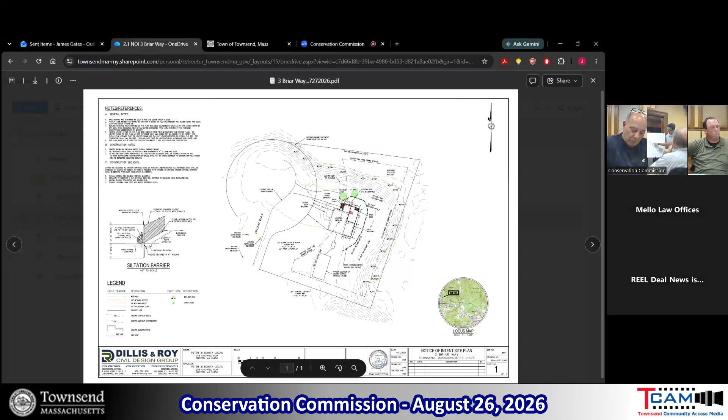The second part of the addition, on the back of the house if you're looking at it from the street, we have a deck that will be at the same elevation as that mudroom, and then a second addition on a foundation that will function as a new master bedroom. The square footage of the deck, which will be semi-permeable, is 350 square feet. The bedroom addition, with dimensions shown on the plan, is about 326 square feet.

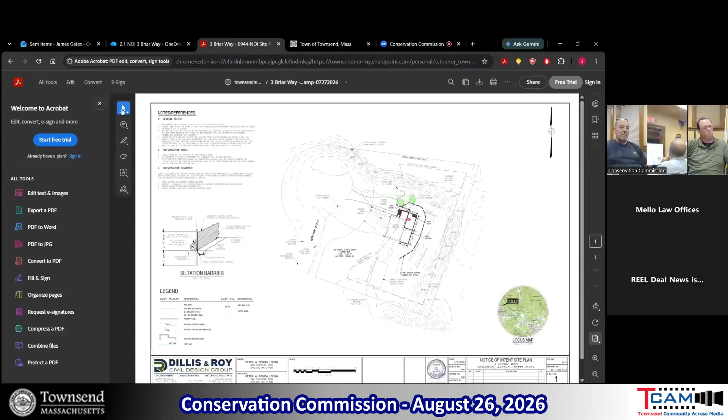Can you explain what you meant by semi-permeable? There'll be slats and spaces between the decking so water can percolate down through, and it's going to be on sonotubes, not a concrete or soil pile foundation. Is it sonotubes or helical piles? Frankly, I am not certain of the answer to that question. Either way, they're minimal disruption compared to a foundation, correct? Yes.

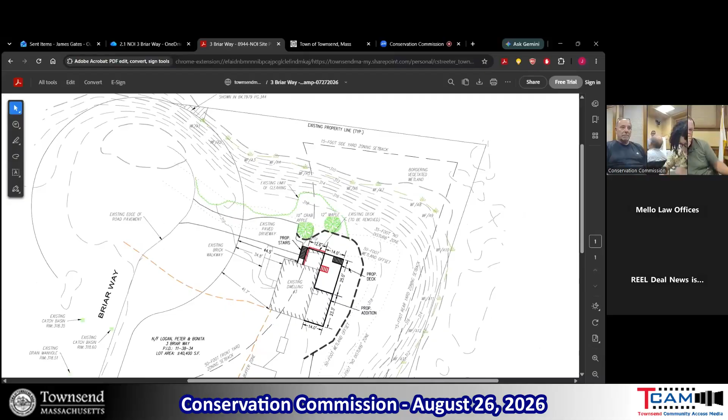Okay, thank you. The site is underlain with good sandy soils. We have the Title 5 report from the septic system showing good sandy soils on site, as with a large portion of this area. We've limited disturbance to completely outside of the 50-foot wetland offset. We do have erosion control barriers that will function as a limit of work, running nice and tight along the 50-foot line to the proposed work and along some vegetation. We are not proposing any tree removal for this project.

I can speak a little to compliance with the bylaw. We are not proposing any disturbance within the 35-foot no-disturb zone, nor any new structures within the 50-foot wetland offset in your bylaw. Again, the existing house is entirely within the 100-foot buffer zone, so any expansion is also going to be in the buffer zone, which is why we're here and why we filed the notice of intent.

The site is very flat and very open in the back right now, so we don't anticipate any significant risk of runoff or erosion associated with the project. And as was mentioned, we did have a file number from Mass DEP already.

Here are some pictures. That's the backyard. On the left side, you can see that corner of the house, that's where the primary building is going, the master bedroom. That's the deck that's coming down. Those are the two trees identified on the plan, which we're saving. That's the deck being removed for the mudroom addition within that same location. And that's an overall view of the backyard.

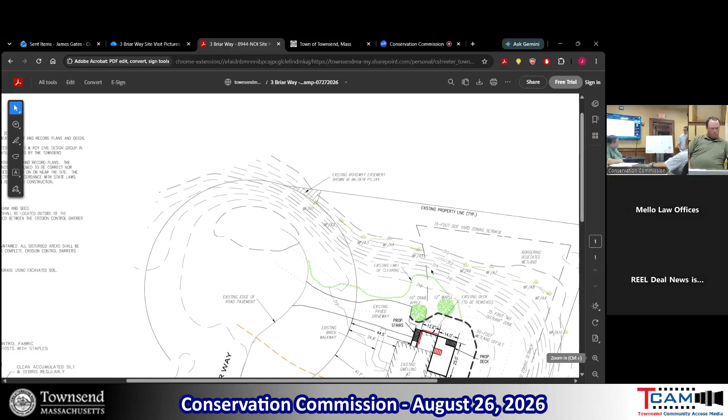You're just going to use wattles rather than straw bales? Actually, we'll have wattles with reinforcement silt fence. Okay, and that, to me, seems more than sufficient since it's so flat.

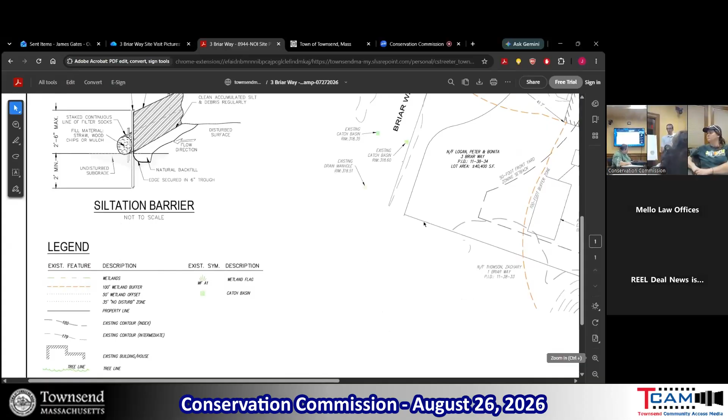I think the wetland boundaries weren't flagged. How does that work - are they supposed to be flagged? That was going to be my next question. When are we going out to verify the flagging?

So I did ask Brian - sorry, Ryan, I must have misunderstood his name - why it was not flagged. We had not marked out the proposed additions, but the flags were hung in the field.

And then it's pretty well defined at the toe of the slope. Yeah, I mean, it's a very obvious lot, so what's going on - the dynamics are straightforward.

They have no yard, and it goes directly into - right. So, Kim, because you're so new to the commission, Mike will get your phone number. So Mike, we did do a site walk. My apologies, I was left out. It's okay, I didn't know you weren't in the roster officially yet. We'll have your name in immediately.

So, but you did flag it? Arrow flag, yes sir, yep.

Where do you plan on stockpiling? So the flags were checked, is what you're telling me? They are flagged in the field. Has this commission or its agent checked? I'm just saying maybe it was done before - this is what we would normally do. I think you recall me asking about the transition flags. Yeah, you did. I did not see any. I didn't notice any either. I'm pretty quick, but okay, so you look, the flags are further down, correct, within the woods - so unless you went down to the edge of the water you probably wouldn't have seen it.

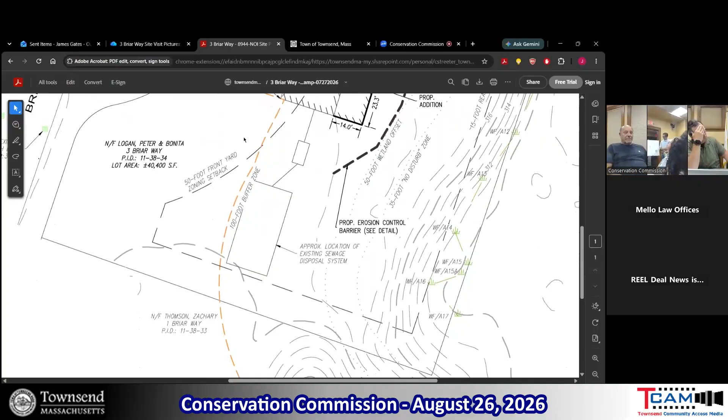We should note the location of where the stockpiled material is going to be, because that is part of our regulations.

So you want a stockpile area like we do every other place, within the silt fence, right? That's what we do, Mike. So I was under the understanding everywhere within the silt fence would work. Then we can go around the stockpile area, one last time, or another time.

So where the wattle is located is consistent with the crown of the tree, but it could be pushed right up next to the trunk of the tree, in theory, or even go around the backside of the tree.

Well, if you do that, Mike—if you start getting under the drip line of the tree, the chances of that tree dying go up exponentially.

I would just like to point out, I do have a note under the construction notes that construction materials, to the greatest extent practical, shall be stored outside of the 100-foot buffer zone. I also provide an addition that construction materials shall not be stored within the... given the nature of the project, it's not uncommon to have building materials right next to where work is happening.

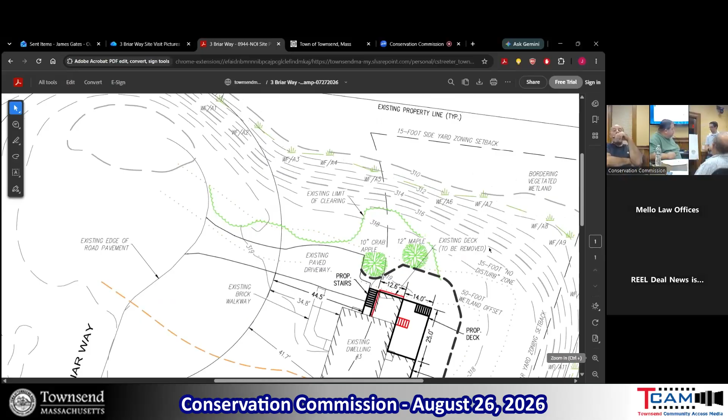Can we see a reason why we can't be moved farther up? It can, we can ask. Well, this is up for discussion. Sandra, you've been quiet, we'd like to hear your thoughts. And same with Abigail, please, both of you.

I appreciate you asking. I was just listening to Mike saying the wattles could be brought closer, and I wasn't aware of that, I'm just learning something new here. But not closer, farther away. So there's more working room within that. Oh okay, I'm sorry.

Were you notified of the site walk, Sandra? Did you get a call about the site walk? Yes, thank you, I did. I was hoping to go but I was unable to. Yeah, it's all good.

That's why I appreciate the photos, so I can get an idea. Could you go back to the photo of the open yard? This one? Yes.

Did you guys ever figure out what that mound is? I did not, no. It's a question, but it has no bearing on the site or anything in it. It's not covering anything, it's just a small anomaly of dirt from who knows what. Could have been leaves from years ago, could have been some dirt they left there.

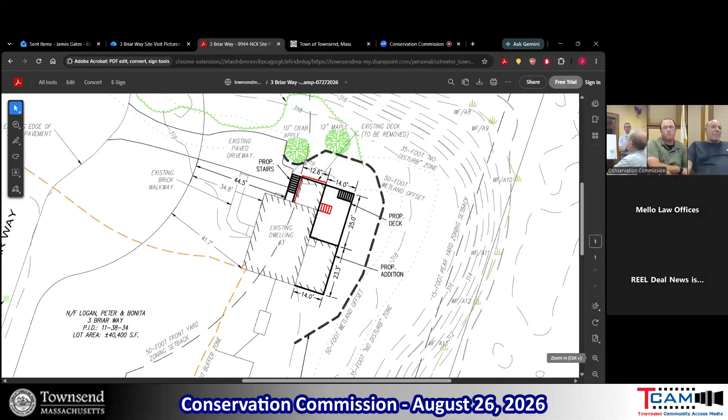Now, if there's existing lawn area that they've been maintaining historically within the 35, can they continue to maintain that in the backyard? If it's existing, yeah - it's been mowed, and from when I saw it, all those mowed areas are existing. Yeah, that's why I just don't want them to suddenly... I understand it's a beautiful green lawn, but it's been a long time. Right, so that's my point exactly.

It's not new disturbance we're proposing. Well, just to solve this issue going forward, we need to make sure property owners know clearly where their boundaries are when it comes to wetlands, so they don't exceed that jurisdictional area. It's as simple as letting the Logans know that if they do this addition, you're gonna lose your backyard. You can't expand beyond this point as far as your backyard goes. It's as simple as that.

And we can discuss amending or adding that regulation. Tonight, I think it's a simple request, honestly. It's kind of like a courtesy, really, to let people know that if you do this, you lose that area.

I think for chain of custody purposes, because you can talk to one homeowner and they can be perfectly understanding, but you don't know they're gonna maintain ownership of that property in perpetuity. That's why you write it as a special condition, and then it goes with the deed. Every plan is different, it's unique, but as a courtesy you let that particular applicant know at that time that if they desire to do this, they're gonna be limited to the backyard. Unfortunately, we're gonna have more and more of these, I think.

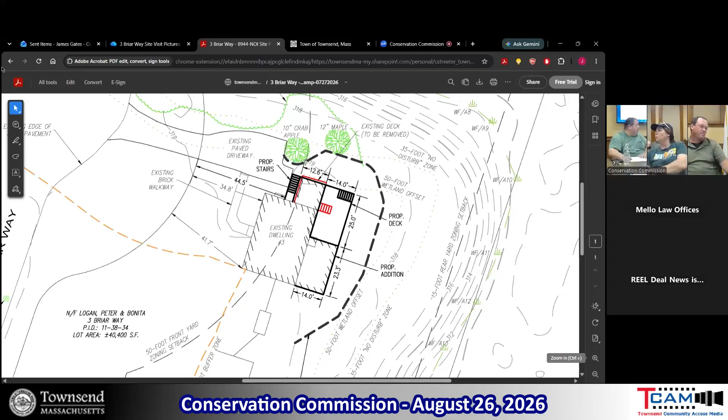We're short staffed right now, so I don't think they're doing that. I was gonna say, when was this house built? Well, it's been a very long time. I pointed out the sidewalk.

There's actually an easement at the end of this cul-de-sac that says 'for future roadway,' and it points directly to the wetlands. I think it was done in the 70s or 60s. I forget what the subdivision plan was, but I think it was late 60s, early 70s, when Robichaud was up. So, okay, a long time ago.

We keep going. We have a 7:45. Sorry, I know, no, I have more questions.

Okay, go ahead. Have we confirmed that the abutter notification has come back and they match the list? I sent it, I did. We missed, I missed living in the past, we literally used to go through the cards and check the list off. Yeah, we don't do that anymore, does anybody do that? Everything's all digital now, online, received, and it goes through. Like the post office can send you verification, and there's an effort to keep it green and save paper.

Yeah, those little cards, something that fell upon Colby to make sure it was printed out. Usually the clerk would go through, as you were referring to in your day, Kim, we'd take the name off the green card and check it off the list. Right, that's how we always did it. So that's all changed, it's digital now? Yeah, it is. Jimmy has such a tough time with that. I do, I struggle with it. I used to like the green card here.

There you go, so that's what that means. I didn't know what that meant. Yeah, there's only 3 or 4 abutters. It's fine, it's counted.

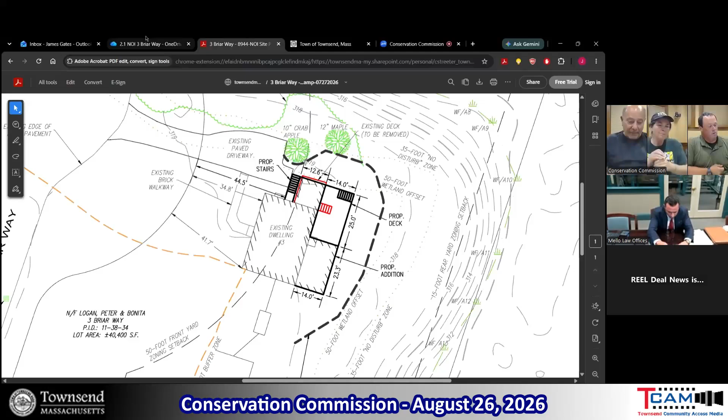I'm gonna make a motion. Brian, I'm sorry to do this to you. You've got to make a motion to continue this. I can't.

Can I make the motion? You can make the motion, Sandra. Okay, right now? Yep, right now, I apologize. I'd like to make a motion to continue the hearing for the mention of DEP number 308-0732 to the next meeting, which is September 9th. Thank you.

Ryan, I'm really sorry, but we need it broken down better, and we also needed a Townsend wetland bylaw. So this is just a breakdown of what we were left with.

In regards to the wetland bylaw, is that something on our end? I have a copy of just one check, but it doesn't break down. There should have been a portion that went to the state, a portion that went to the town.

Who's it made out to, Tom? Town of Townsend - it's vague. We have zero help right now. Absolutely, the admin that's helping us is doing everything she can to catch us up.

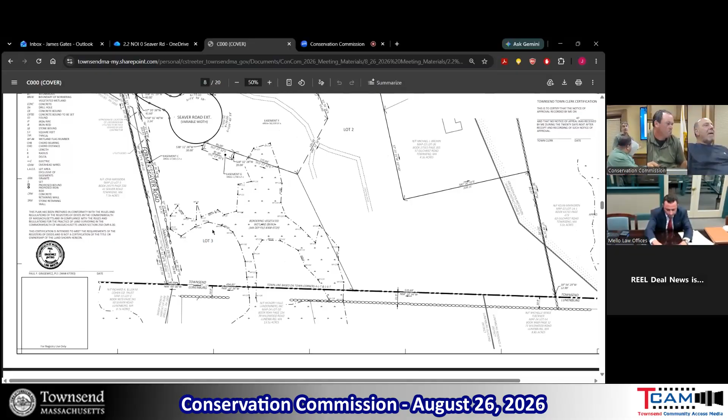So while we're scrolling, the design is predicated on your local stormwater standard, which regulates development for water quality and water quantity mitigation based on the 10 standards of the state policy, as well as what is effectively the EPA's MS4 requirements for DPWs. So that means there's, in addition to the state stormwater standards, total phosphorus and a higher level of TSS administered through your local stormwater permit.

Since this falls in a major stormwater permit category that's administered by the planning board—it does fall under the major storm—correct. And so the applications to the planning board were for definitive subdivision and for the major stormwater. Okay, so the subdivision, the planning board had...

The bid set of plans, and the stormwater report peer reviewed by Hoyle Tanner for both compliance with the subdivision regulations as well as the local stormwater regulations.

And that hearing the other night, well, a couple months, I mean, a month or more ago, the stormwater with planning was complete. Their peer reviewer says that all comments have been addressed, that this satisfactorily meets all your local requirements.

So it meets all 10 standards of the state, 1 through 10 that you're accustomed to, in water quality and water quantity, and that doesn't involve a 401, right? That's correct, there's no 401 here. There's no alteration of any boundaries, so therefore they would not have triggered a 401 water quality. Doesn't trigger a 401. Gotcha.

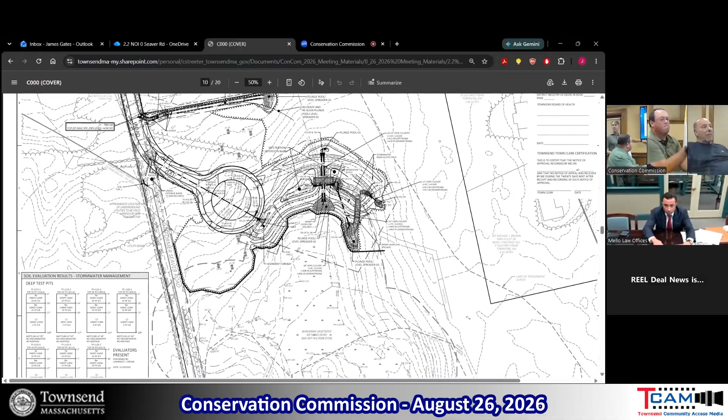Okay, right here. We've already picked through this plan. I know, and Wayne went like, wow, right. And the site walk was rather in-depth. Right here. You were there too, right, Mike? Mhm. Okay, so I think you were the only ones there.

This is going to show you the work that is generating the conversation and within your jurisdiction. So again, the wetland system kind of sticks up off the bottom of the sheet here.

The bolder line is the 100-foot buffer zone that runs around the site like this. Then your 35 and 50-foot buffers are down in here. The 35 is this dash line, there's no work within it. The 50 is slightly beyond that, there is work within it. And then, of course, the 100 out here, there is grading and all stormwater infrastructure. The road ends just shy, and the right of way ends just shy of the 100-foot buffer.

The paved road actually ends about 110 feet from the wetland, to the outside edge of the cul-de-sac, the outside edge of the pavement, just to that edge, about 110 feet from the wetland.

And then the outlet pipe from the stormwater system that would drain the road and empty into this system is just within it, maybe 10 feet within. And the rest of it, there are some other pipes, outlet control structures, everything to manage the flow of the runoff that reaches these ponds, as well as those two culvert lines running through the center here.

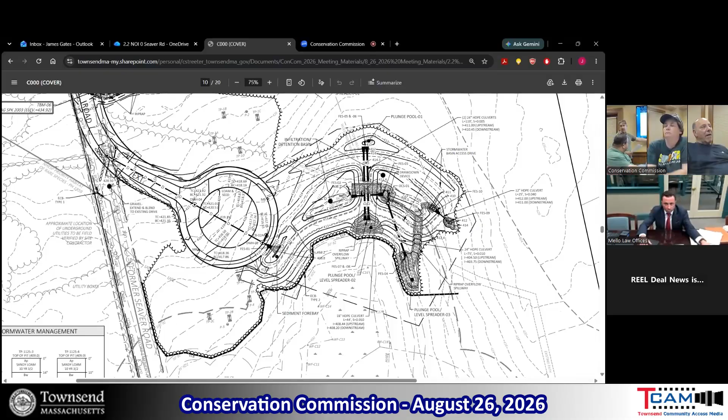Those are to collect the tributary area that is from offsite, from the neighboring homes, and rather than route it into the stormwater system and overtax that, requiring it to be larger, we're passing it through the system under the basin and into a discharge point, again, outside the 35-foot.

So it's actually outside the 50-foot. So all of this would be, with the exception of the pipes and some flared ends and an outlet control structure, which is really nothing more than a manhole with two holes in it to allow water to pass through at controlled rates, all earthwork, no concrete or other materials, other than the pipes and the structures.

If this is primarily what you're looking at, it's primarily earthwork. There would be some rock riprap for overflows and outlet protection, for all the slow-down sections to where you still have water. Exactly. So all of that will be included in the stormwater report. Some of them will have a man-made product in there. Right, there's no man-made product except for the pipe.

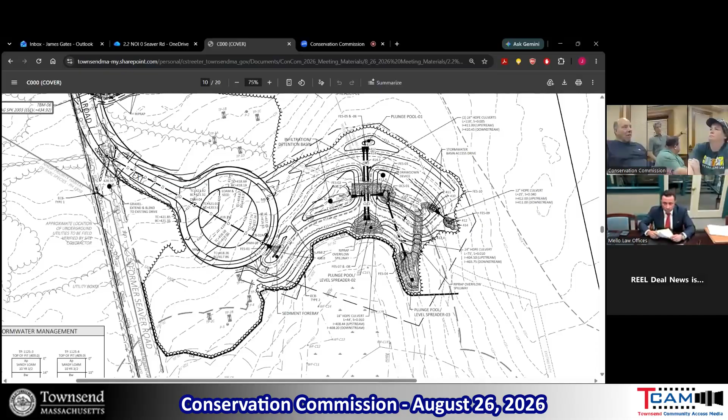So this is all documented in the stormwater report that was done in June, which was essentially the stormwater report that was done originally in January or February. That was originally filed with the commission, with the exception that we beefed up the documentation to demonstrate compliance with the phosphorus and the 90% TSS removal.

The simple way of thinking of how that's accomplished is the federal guidelines say that if you're using certain types of stormwater BMPs, in this case an infiltration system, retaining and infiltrating up to 1 inch, the equivalent of 1 inch off all impervious areas, satisfies the phosphorus and TSS requirements. Depending on the soil conditions, there's a sliding scale. There are actually graphs and numerical methods to solve it. We included the graph as pictures, and it's much simpler to understand. But again, that's all calculated and tabulated in the stormwater report.

This was again peer reviewed by the town's consultant, Hoyle Tanner. That was the first round; we did get a clean bill from the planning board's third party consultant. Correct, because we have no ability to review a stormwater report ourselves. A lot of commissions aren't able to either. So why are we stuck on it? Let's keep going.

Essentially, your jurisdiction is this 100-foot line, with the understanding that during construction there will be disturbance. And then eventually there will be homes that will require additional disturbance, which are not part of this plan. So there'll be separate NOIs filed for the home construction at the time that the road is ready, when the town is ready to permit building.

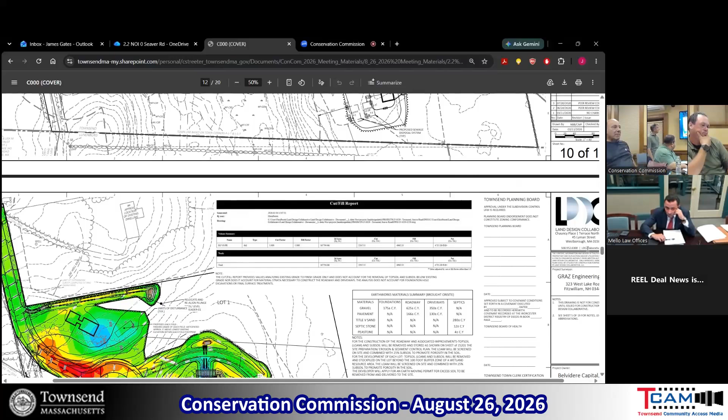Hold on, yeah, did I go too far? No, that actually shows the house. Oh, there you go. I'm trying not to go too fast.

Would it have been helpful for us to have a plan in front of us? It would have been helpful, but it's so many pages. So here's the house you're talking about.

Right, and isn't that the buffer zone line going through the middle of the house? That is, yeah, correct. So no alternatives were explored — they're just kicking it to us if they approve it? So as I say, we're not asking for approval of the house location.

I understand. So the road layout was assessed multiple ways. There's no alternative to the road layout except to shorten it, and then you'd get 2 lots. We got that from Wayne. So this road, which is the allowable distance by the planning board, creates enough frontage for 4 lots.

So this is a 3-lot proposal, but once again, state 4 could go in there. Well, we're not doing that. There's a couple things — you're talking from a stormwater perspective, absolutely. This would still be exempt from the state stormwater, but it's irrelevant in the town because you have a more restrictive standard.

Much more, similar to all the other towns. Kim, ask your question please. Kim, I'm sorry, I didn't mean to cut you off. I can't even ask it as a question because we're not looking at the houses, but I can see what's gonna happen with lot 3.

It's possible — it's a 2,000 square foot house. You're gonna have a young couple with a couple of kids, they're gonna want to use their yard, but their house is in the buffer zone. So we're showing the 35-foot buffer, and you were talking about demarcation or delineation of the buffer zone.

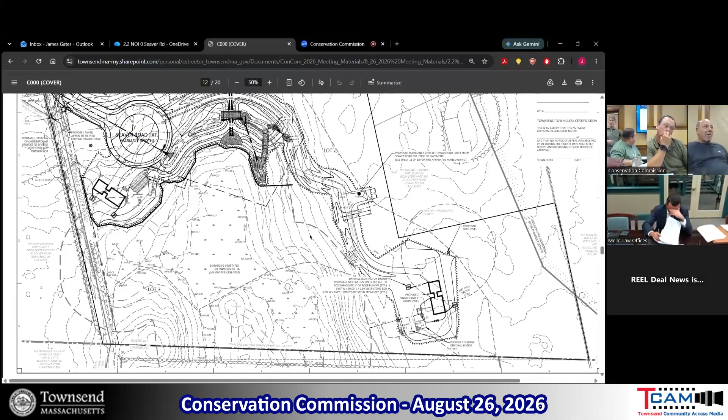Keep scrolling, I'll start answering other questions. There's construction details for all of this, erosion control measures, the BMPs, every pipe and outfall and all those items required for planning the construction of the road - road cross section, roadway depth, specifications per MassDOT or AASHTO requirements. There are a lot of dynamics on this set of plans, everything down to water drainage and water controls.

We're trying to be thorough, I understand that's the requirement, but there's a lot to it, there's a lot of moving parts, there's some history behind it. I'm more looking at some more history to this, that's all I'm gonna say.

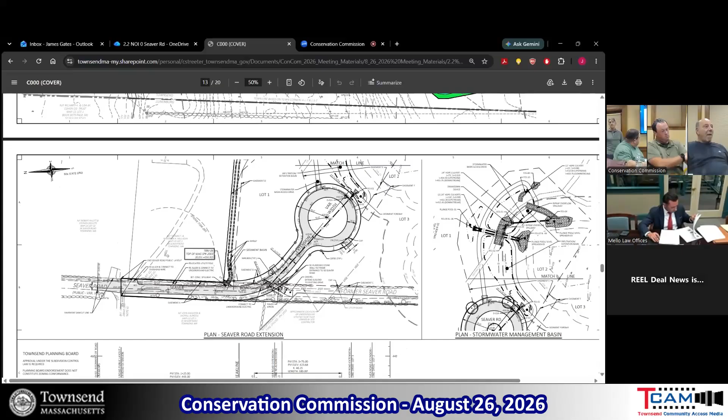So your road profiles have been deemed adequate and consistent with your town requirements. There's a planting plan for the street trees.

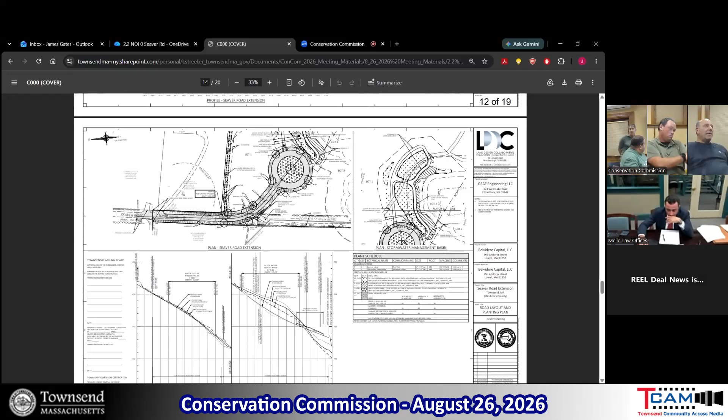Has this still presently been in front of the planning board? They continued the hearing Monday night. Has anything changed since this was last in front of us?

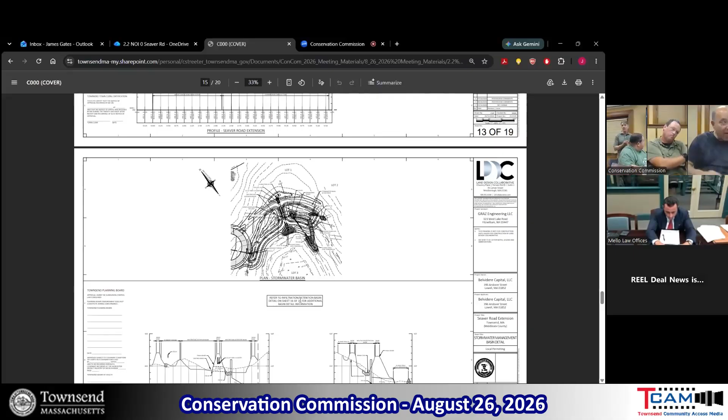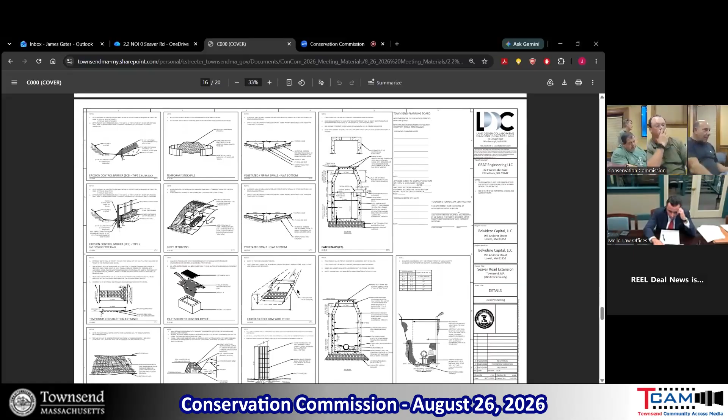What's changed is the documentation of the stormwater, and then commentary regarding plan content necessary to check a box in the subdivision regulations. But the layout of the site, the road, the grading, drainage network, the location of the home all remain the same.

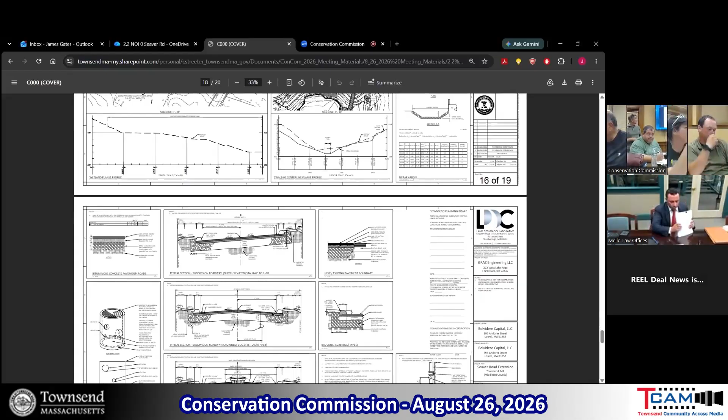Right, and that's something we would have probably picked up on when it came to us. How does that carry through? So since it's on this plan, you make a condition that the infiltration trench along that particular lot is constructed - it goes with that particular lot, that particular house.

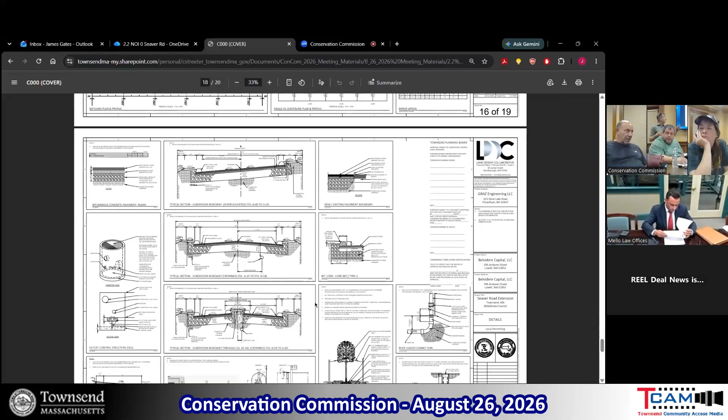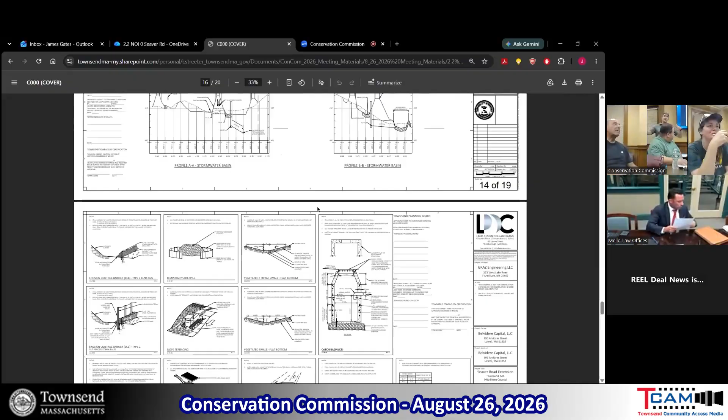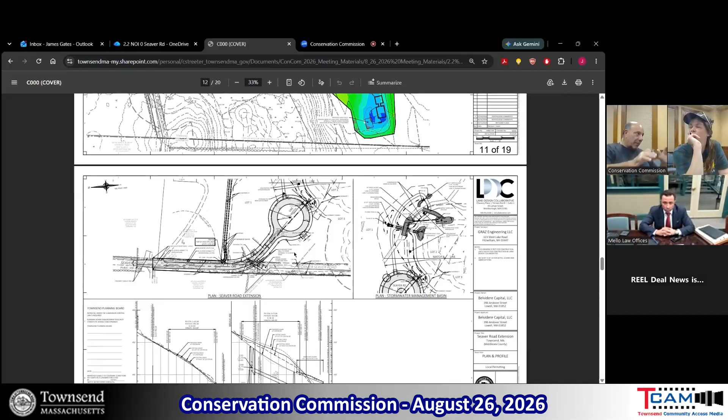Where are the colors? I'm pulling a hotspot off my phone because my Wi-Fi password wasn't working.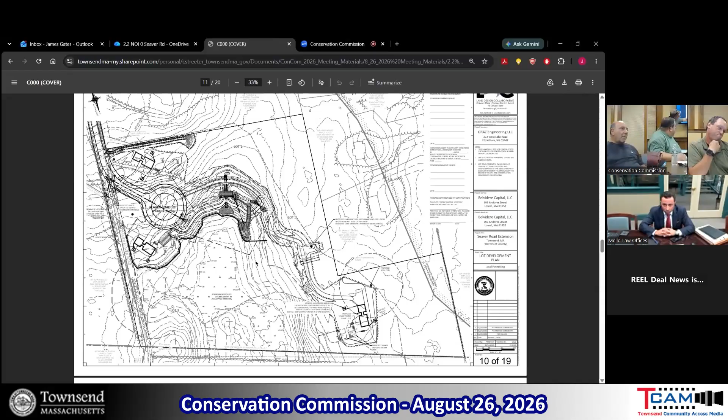It's right here, this item, and it steers along and it would be here. So it basically takes the water into this end of the basin, the southwestern, southeastern side of the basin, and controls it. Where does it run back under? It runs into this basin, so it fills up the basin and then it's routed through the system.

But that isn't necessary for the peak rates, it's necessary for the phosphorus and TSS from the town's standards. So that would be the one sort of grading add-on, the rest of it is notes - some plan content to meet the requirements of the subdivision regulations, plan content or notes related to the subdivision requirements.

That's what changed. In terms of important design elements, it's basically this - we always had this sort of diversion swale. So if you look at the grading, this diversion keeps the runoff from the neighboring lots, meaning the stone wall and separation, from above, rather than letting it run onto the road and into this. We're steering it around and letting it run through the natural course. That allows us to keep the system smaller.

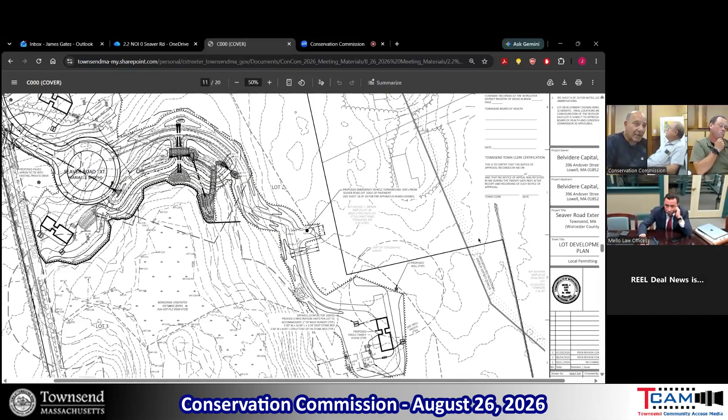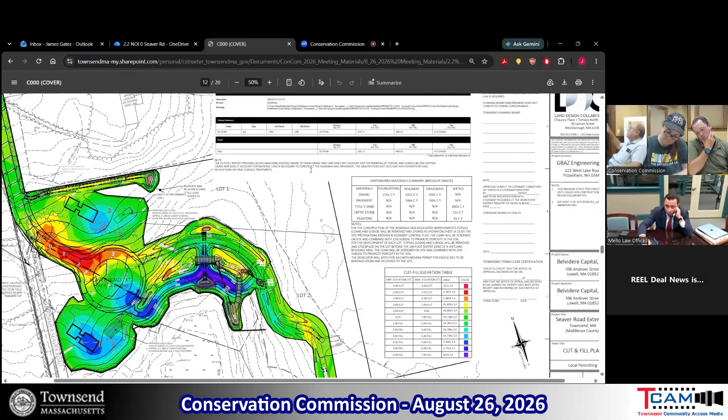Is there - okay, Mike, let's go around the table. It was beginning to come back to me. When we saw it before with your colleague describing it, we concluded that it was, for some of us, the most complicated, complex system we were going to encounter. We had lots of questions and all of our questions were answered. The last one that Jimmy described to you about how it would flow naturally down there - I remember that discussion, and I dare say his explanations were eloquent, more than thorough. I recall that we were pretty much satisfied, or I was, with the plan as described.

I'm never satisfied, but I still have more concerns. I have some stuff I'd like to look at and revisit. How many commissioners do we have in front of us that I know haven't even stepped on that sidewalk? More than that. And the level of complication behind it warrants such, but I'm just saying that at the time, we were impressed.

So is this going to be a public road? So the way it's designed is to be accepted by the town. Of course, it's a petitioning process, town meeting, after it's reviewed. Does it have ability for emergency vehicles? No, Jimmy, we're not going down that road because that's not our jurisdiction.

I asked because of the DEP comments. The DEP comments, I think, were issued prior to the revised stormwater report, which addresses those questions. And I actually take exception to that comment - that's actually incorrect, the DEP comment.

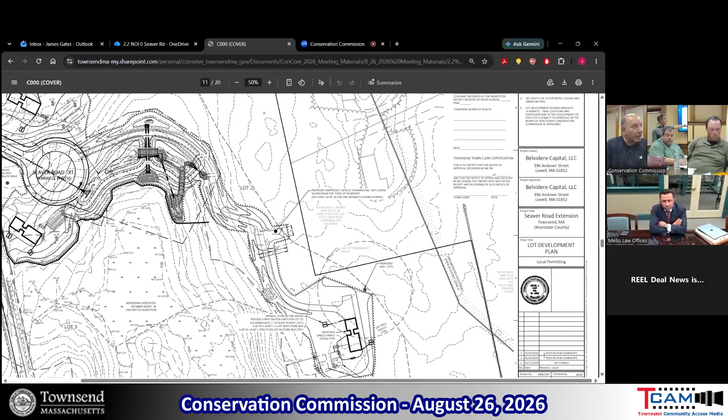If you scroll over, that should be the plan we're looking at, and the June stormwater report. Yeah, right here, 720.

That's where it would have been nice to have a set of plans in front of us. Well, it would have been. I'm only being cranky. Had I known, I would have done 18 pages of rustling, but there should be a set of plans in here, and they're not.

We can get you a set of drawings if they haven't been mailed. I know we delivered multiple copies to the planning board. We don't have a copy. Okay, I think that's easy to rectify.

Do you have the June stormwater report? I see two signed, one says June, or they both say February. February, yeah, February. Okay, well then you also need a June.

I know you have it digitally, but we can get you all that stuff. And we should have another one, because that's old. We need updated stuff.

Is there anything else we need to address now so that we don't continue this more? I know you want to do a site walk, I hear that.

So, Mr. Chairman, might I ask, are you in agreement that we should bring our new commissioners up to speed with the site walk?

Sandra, did you go out to the site? No, I think it was already in progress by the time I came around. Okay, I know you were new. And I know Kim is fresh.

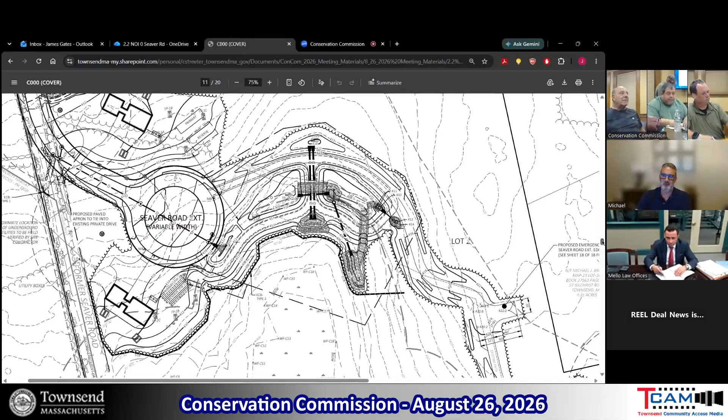He obviously is right next to you, 38. Yes, gotcha. What page did you want? Page 1, that'd be the easiest. It's on several pages, but substantive page 1.

No, hold on. If you could just stop there. If you look at the very top on the left, that's Mr. Ayot's lot, 38 Seaver Road. And if you follow the road down, what's labeled as 40 Seaver Road is 0 Seaver Road's property. And if you take it to the very northern terminus, you see it ends past Mr. Ayot's property. We couldn't hear everything, but I thought there was some confusion whether he was an abutter or not.

It's quite clear he's an abutter. That road appears as a road is actually 0 Seaver Road. It touches 38 Seaver Road. Great, and the assessor doesn't know that. That's basically what we determined. We're not throwing fault, I'm only saying that we ran into a big problem. He wasn't notified, we had to shut that meeting down. Once again we're up against this, I don't know why, and I'm not making apologies for it.

May I make one other point? We heard that the drainage system was over-engineered, from the applicant's engineer and from the Conservation Commission, and it was the most complex they'd ever seen. I admittedly don't fully understand the jurisdictional issues, but I do know that if you go forward in time, particularly 10 years, people come and go. The odds of 3 homeowners getting together and maintaining this over-engineered, most complex drainage system you've ever seen are quite slim, at which point presumably the runoff from the road and stormwater would go into the wetlands. So I'd just like to make that point.

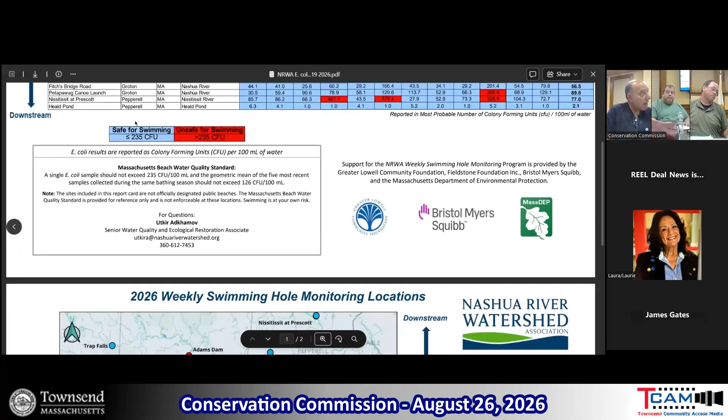So this is Nashua River Watershed Association, that's why these are the samplings, because they're all part of the Nashua River Watershed.

Brought to you by Bristol Myers Squibb.